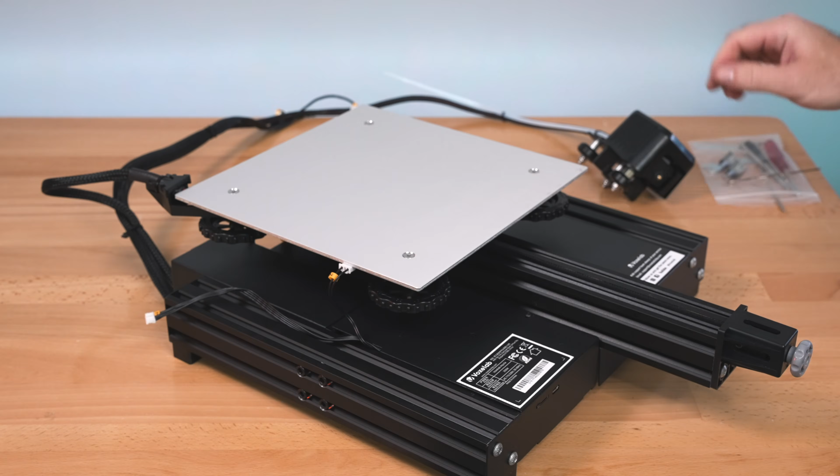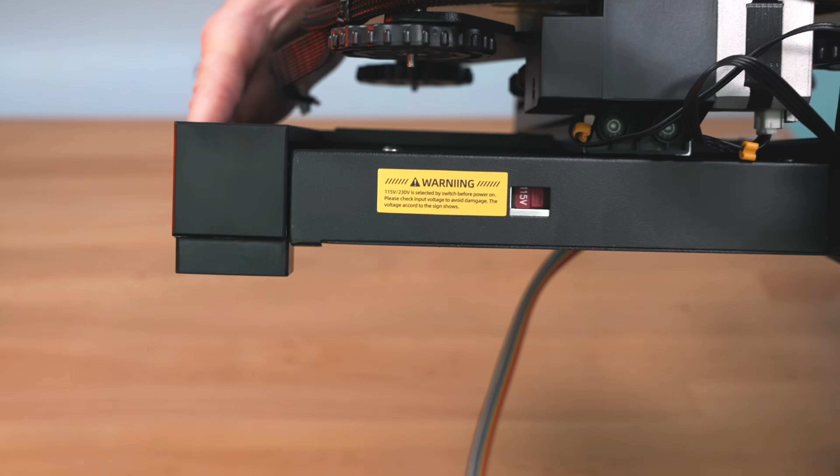Before we get carried away and start assembling this thing, because you know that's going to be pretty in-depth, let's go ahead and do something that's pretty important and you don't want to forget. So the first thing is our voltage selection there in the back. Depending on where you live, you're going to switch that either to 115 or 230, and you guys can see that ours is switched to 115, so we don't have to do anything. So make sure you check that before you forget, because if you don't switch that to your voltage, you could damage the printer.

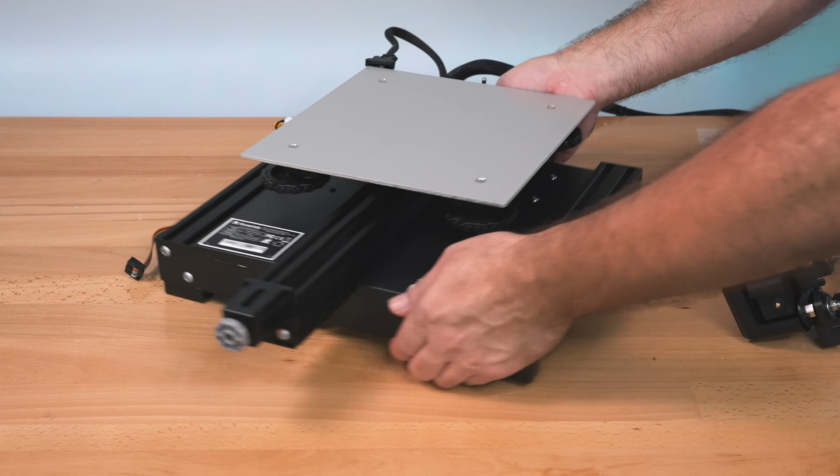So the next thing we want to do is check our frame, and what I mean by that is that if we put the printer down, we can see we have wobbling back and forth. So what this means is that the frame is not sitting straight. No matter how I put it, it still moves around quite a bit. It wasn't assembled straight on a flat desk. So make sure you have a flat surface before you do this, wherever that is. We're going to grab the larger wrench that was provided, and we're going to loosen these bolts on the sides. There's 4 of them. Surprisingly, they were already pretty loose. So this is going to release the frame where it can bend in the right shape, I guess.

So now you guys can see we don't have that wobble anymore. We just untightened the bolts and it kind of fell into where it needs to be. So all we got to do now is retighten them. This is a pretty important step, because you don't want to have the printer all built out and then be doing this later. Make sure you snug these all up. Even if your printer is not crooked and already nice and level, you need to go back and check all these bolts and make sure they're tight enough, because most of the time they get loosened over time. Get them pretty snug, but don't over tighten them. Be careful with that. We do have 4 of them, so we have pretty good clamping force there.

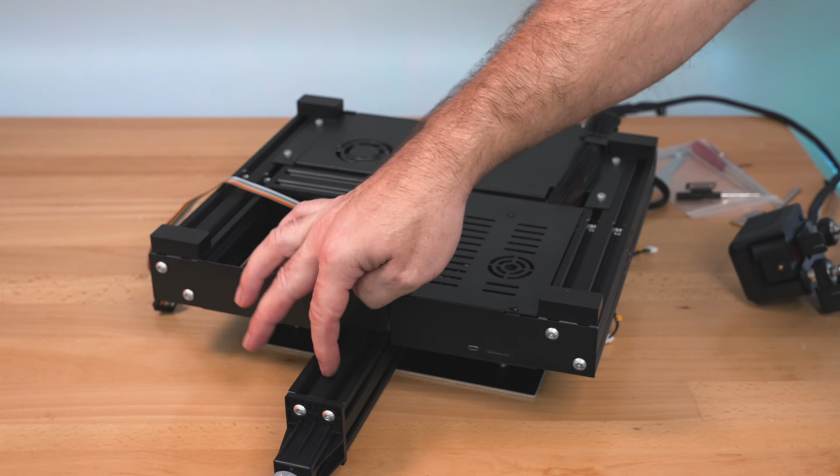All right, and we're gonna do the same thing on this side. Make sure that it's still level, and then we'll snug these all the way up also. All right, so we're good now. After this, go ahead and flip over the printer. Under here, we need to check the bolts here in the middle, which hold the Y-axis rail. You want to make sure these are nice and snug, and mine were too loose. You want to snug these up pretty good, because this is the main point where the Y-axis is held. You want to make sure that doesn't move while you're printing. So we're going to snug these up pretty good. And that's it. That's our main frame bolts for the bottom rails that hold kind of the whole structure together.

Now while we're under here, you guys can see we got really nice, big, large, squishy rubber feet on 4 corners. So I'd love to see that. That's going to minimize the vibrations coming from the printer, which will help with noise. So let's flip this thing back around. Check again, make sure nothing's wobbling and it's straight. If you do have wobble, go back and fix it, because you don't want to have any kind of play in the frame.

Another thing that's good to adjust before you assemble it all together, because it's easier to reach, is the bed here. Because we don't have our frame built yet, we have really good access through the side. If we look underneath, we can see there's some rollers there, and you can also see the eccentric nuts, and that's what adjusts the roller farther and closer away from the frame. We got 4 rollers, 2 on this side and 2 on the other, and they go around the frame. These are adjustable and these are just stationary. So we're going to grab this open-ended wrench and we'll be able to turn our eccentric nut with it.

Now before we do that, we need to check it. So what I'm going to do is go underneath and kind of spin the rollers. There's a little wobble. If you guys maybe can see that, it does move around. But this one here is perfect, and that one needs to be tightened up just a little bit.

So the idea here is that you want that little roller, you want it to kind of spin in one spot. So you want to grab your hand under there and spin it. So I'm actually spinning the roller. If you can't spin it, that means it's too tight. And if it's too loose, you're going to have a lot of wobble in the bed.

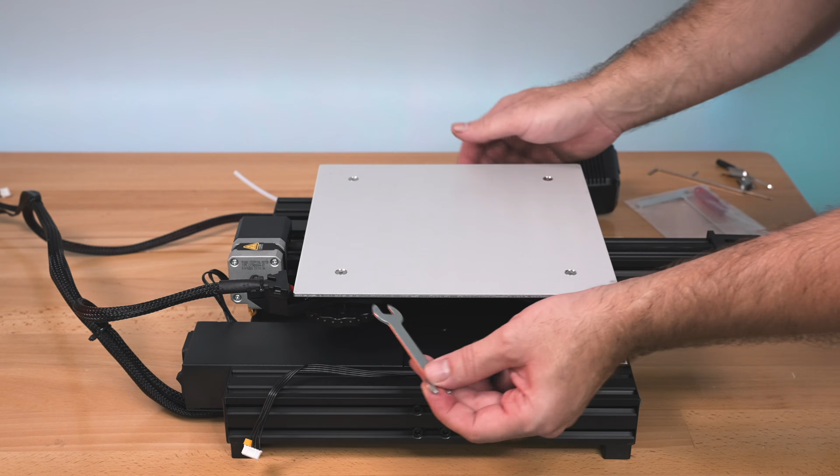So to tighten it or loosen it, we're just going to put our wrench on the eccentric nut and then turn it one way or another. All right, so I turned it a little, and that's actually perfect. Right now I can spin the roller with my finger, so that tells me that it's not too tight. If you can't spin the roller with your finger just in one spot, kind of like doing a little burnout, that means you're too tight.

But if you're too loose, you're obviously going to see the wobble. So the idea here is to get it just tight enough where it doesn't wobble. And this is what we got here, and you're going to have a really nice smooth operation. This is quite important for getting the best print quality out of the printer, is to adjust all these things correctly. Hopefully that made sense.

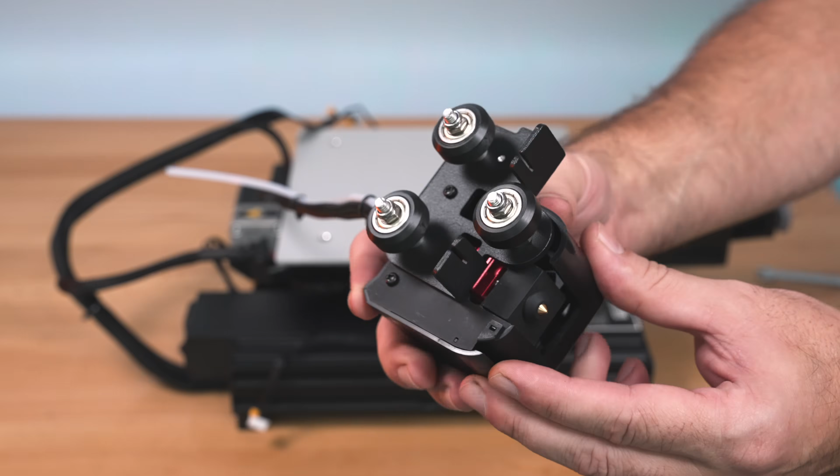You guys can see here on the hot end we have the same situation. We got 2 stationaries and 1 adjustable down here, and we're going to do the same thing later on. We're going to adjust this roller to go up or down to get closer or farther away. So yeah, pretty simple once you understand how it works.

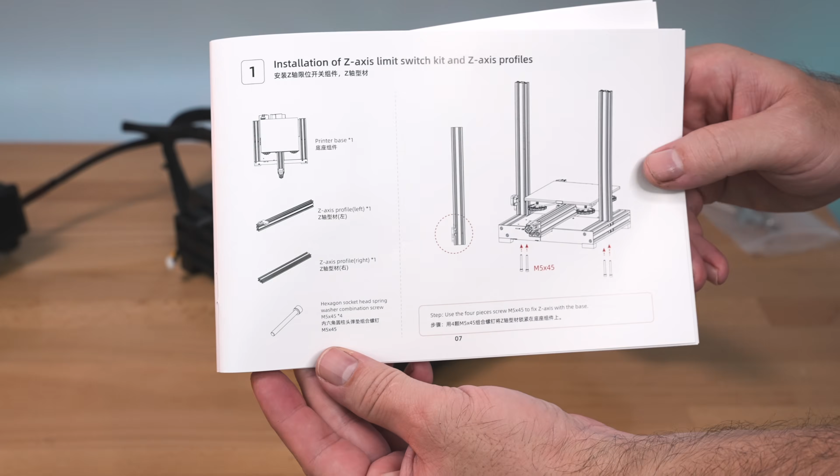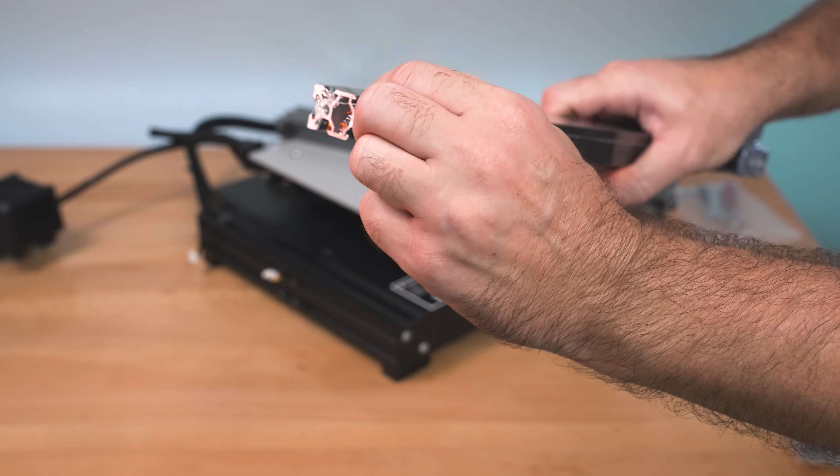All right, so let's go ahead and go to our first step, which is going to be installing the Z-axis profiles. We're going to need 2 channels and 4 bolts that will go underneath. So here we have the channels. Let's go ahead and unpack them. You guys can see our Z-axis switch is already on here. Go ahead and pull out our lead screw, put it to the side. Be careful with the sharp edges on the ends.

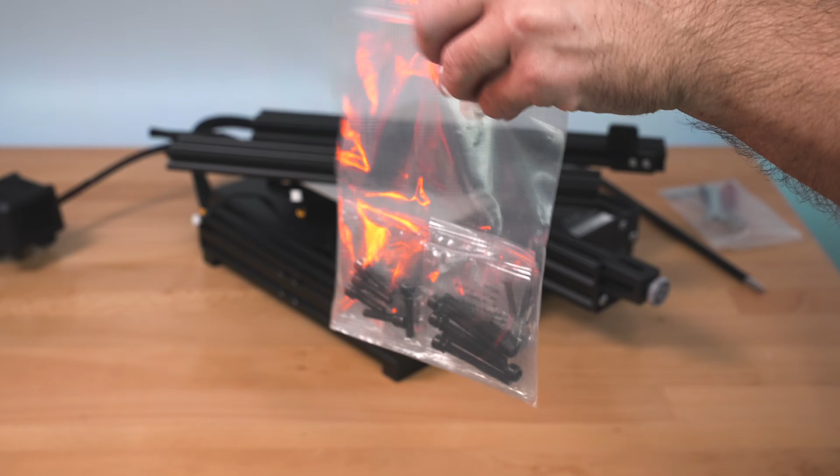And the other channel is just clean with nothing on it. And they're going to go on each side of the printer. The one with the end stop switch will go here. We can see the plug to it on the left side. But before we do that, let's find our bolts, which are in this bag. There's little packets that are labeled, and the one we're looking for is called M5x45s. Little letters on the packets say what they are.

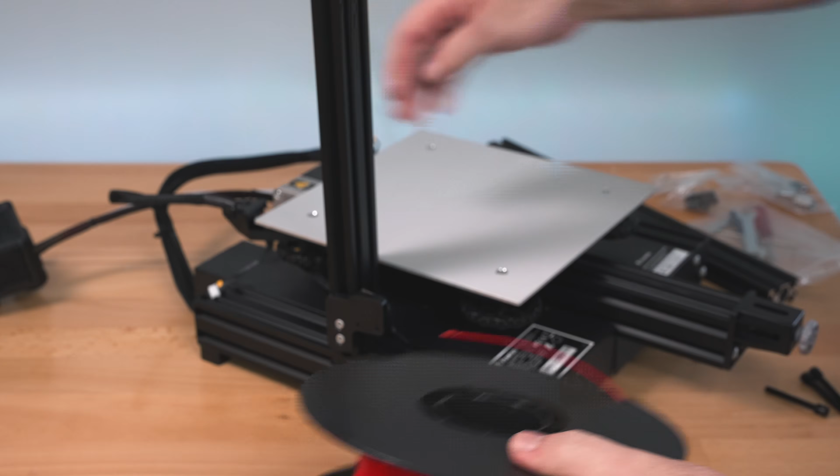All right, so let's start with this one here with the limit switch, and it's simply going to go like this. Our bolts are going to go underneath from the bottom up, and you guys can see them sticking out right here. We'll go ahead and put both of them through. We'll grab our channel, line it up, and start it with our hands. However it is easier for you to do this, you can go completely sideways or maybe even prop up the printer with this spool here, so it kind of helps you hold it.

But yeah, we're essentially just going to start the bolts and run them down. We'll grab our wrench. We are going to need to go a little higher here. Now it's quite important that you don't tighten this yet. So just run them down is all we're doing. The reason you don't want to tighten it is because we still have to assemble everything, and we want this thing to move around and naturally kind of go where it wants to go.

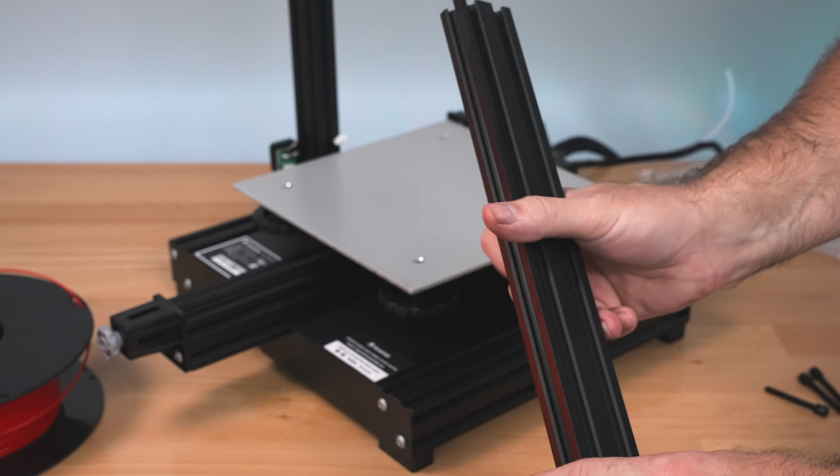Same thing for this side. On this channel, it doesn't really matter which is the top or the bottom. It's exactly the same, looks like. So we'll grab our bolts and channel and go ahead and run them up. And they actually do include an extra bolt just in case you need it. And now we have both of our Z-axis channels on.

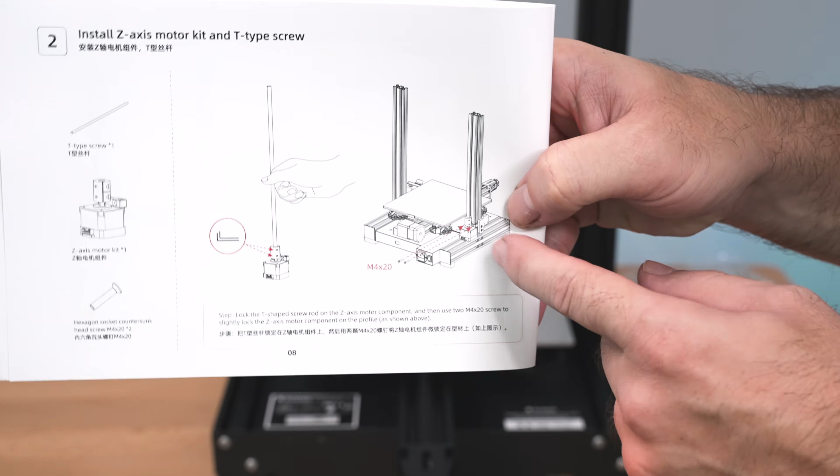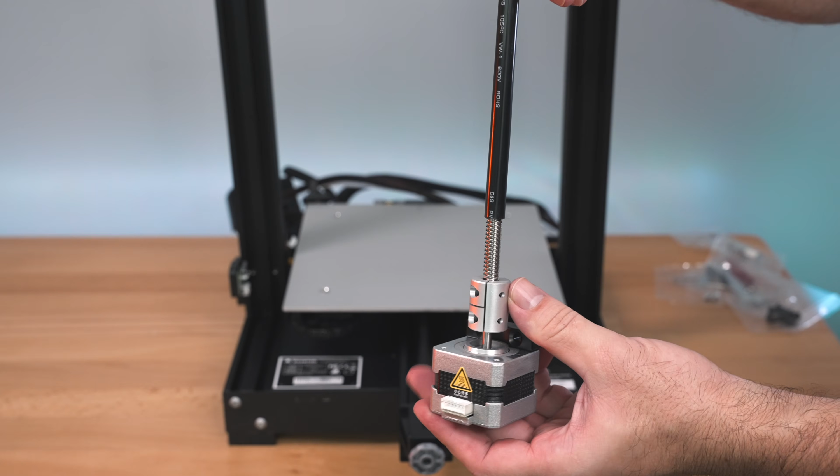All right, so for step 2, we're going to be installing the lead screw into the motor and then installing that into the printer. We're going to need 2 bolts, which are M4x20, and these are in their own separate pack. So let's grab the motor and the lead screw, and we'll put the lead screw inside the coupler, just like that. You can push it all the way down, but I recommend lifting it up just a tiny bit. I mean, just a hair.

That way the lead screw doesn't touch the motor shaft, because there is a potential it could make noise. Now we're going to grab an Allen wrench and tighten this bolt on the top to clamp it together so the lead screw doesn't come out. And we can check the bottom bolt too, make sure it's tight. Pretty simple here. And it looks like we're really straight. I'm spinning it. So that's great.

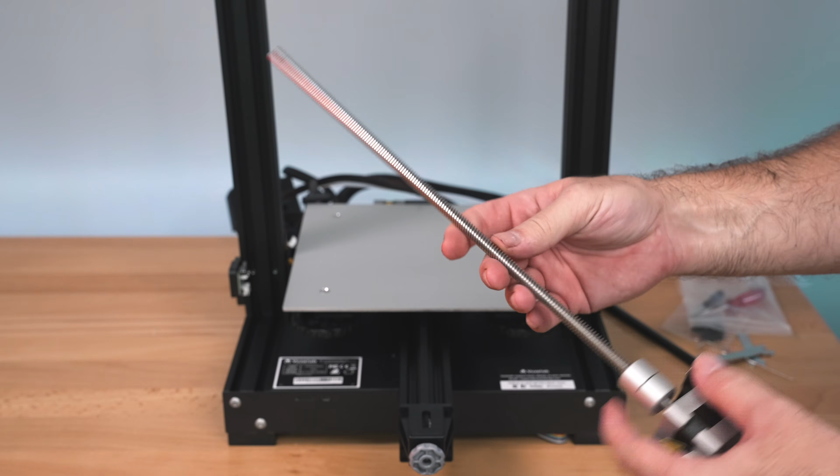And also, if you want to make sure your lead screw is straight, you can grab it before you install it and just roll it on the table and see if it wobbles around. That'll tell you if it's straight or not. If it does have a little bit of wobble, that's okay, as long as it's nothing severe. But they should be pretty straight.

And if you can see this bracket back here, this is where our bolts will go through the front here, and they kind of barely fit in there, so you have to kind of force them in, as it's really tight. And then this part here will screw into our channel, which is going to be the same side where the end stop switch is.

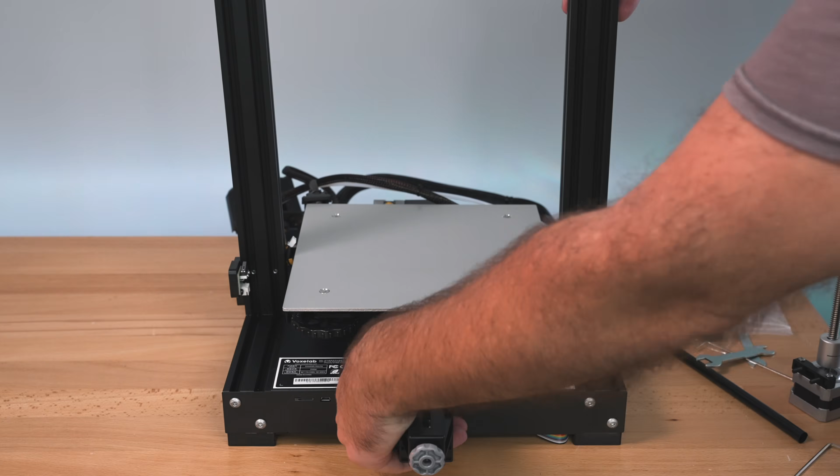Flip the printer around. You can see there's a couple threads there through the channel, and that's where the bolts will go. So we do need to raise it a bit so it can line up, and then we're going to tighten it up. So this bracket here, the way it mounts, it's pretty secure where it needs to be, but it still does move around quite a bit. So you can probably see how much the lead screw moves on the top.

So what you want to do is line it up. If I could show you, try to get the whole side here. If you can see the lead screw in the channel. So the channel is not tight yet. But since this thing does mount on the channel, what's important is that your lead screw here is not offset to one side. So if I do this, you can see that's obviously not okay.

If you're even a little off, that can put strain into your lead screw. So basically what you want to do is just line it up as straight as possible to the channel and then tighten those little bolts up. And we should be good right there.

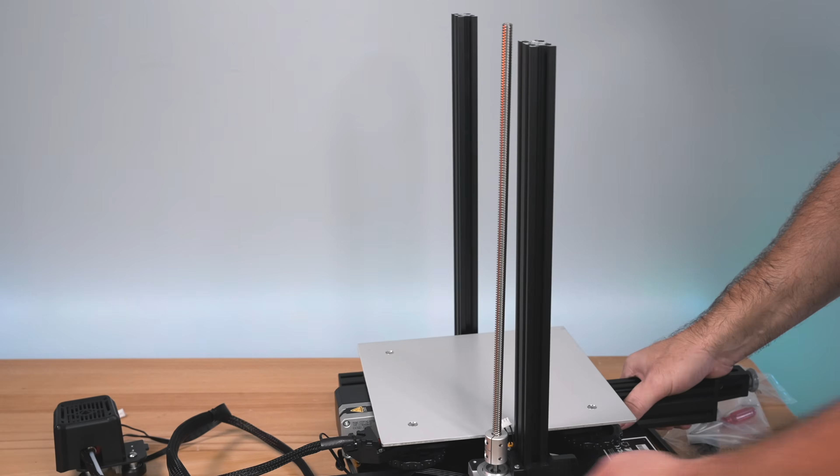Now another thing that you might want to check, and you don't really have adjustment on this, but if you can see here, you want this to be as close as possible to having the same gap, but it's a little bit off. If I spin the lead screw, you can see it does have a little bit of play. It's very tiny, so I would say this is pretty much perfect.

But this part, if you want to absolutely get this perfect, you'll have to adjust something down here, like shim the top, or better yet, there are tiny little bolts on top here that you can loosen, which will let you give play back and forth. But from my experience, this is pretty close to where it needs to be. So just a little bit doesn't make a huge difference there. And plus the higher it goes, the more leverage you'll have to push this back a little bit. So not a big deal, but if you want to be a perfectionist, you can adjust that.

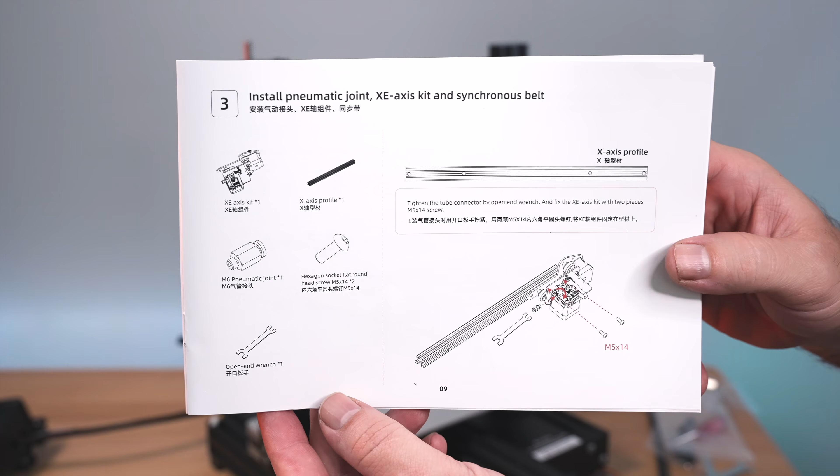All right, hopefully we're not going into too much detail here. So for step 3, we're going to be building out the X-axis assembly with all the parts on it. So we can move the printer to the side for now, and we're going to need to grab the X-axis channel, and that's going to be the one with a bunch of holes, and also it's longer. So if you see the 2 smaller channels, one of them is longer, that's the one we need. And the sticker here says X-axis profile.

So this might get a little more complicated because we do have a lot of holes and hollowed out places, and you're just gonna have to pay a little more attention in these steps here. But believe it or not, it's not that hard. So these are all the things we're gonna need: the main extruder assembly, a coupler, which it does come with 2, but we just need 1, I think, 2 M5x14 bolts, and this wrench here.

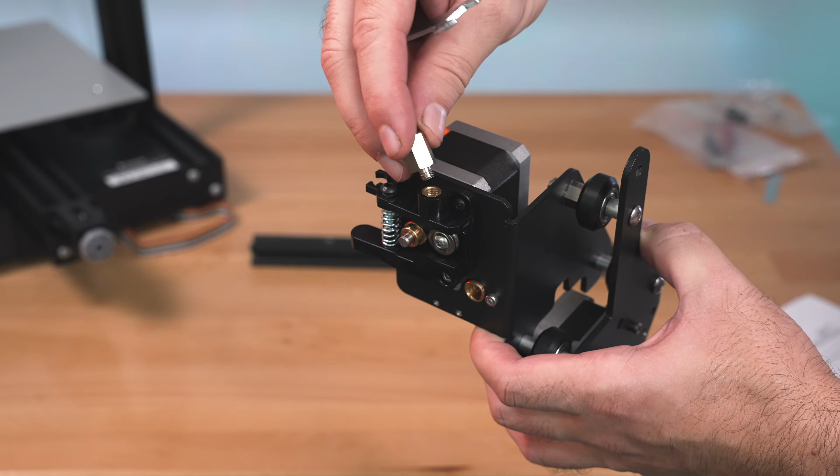So let's first go ahead and grab the little coupler and we'll install it onto the extruder mechanism. So literally just, and then we're going to take our wrench and just tighten it up. But be careful not to make this tight. Just snug it up a little bit and that's it. You don't want to over tighten that. So yeah, as simple as that. We got that on there.

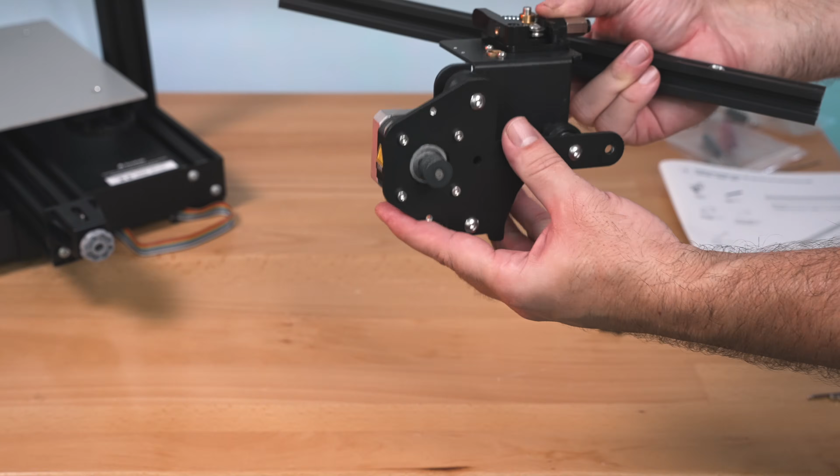All right, so for the next part, we're going to have to connect this piece to the channel, and it's actually not too hard. It's just a little bit maybe confusing because you got a bunch of holes everywhere. The way you know you're doing it right is that if you see this bolt here, this bolt is actually going to fall into one of these hollowed out spots. It actually looks like it's symmetrical maybe. So maybe it could go on either end. Just kind of interesting. If they designed it that way, that's actually a lot easier to figure out.

You're just going to simply grab the hollowed out part and set it over this bolt. And then you got a hole here that will line up with the threads on the channel, which a bolt will go through the other end here. Through there, the bolt will go into here. And I'm gonna go ahead and check the other side to confirm. And yeah, sure enough, guys, it doesn't matter which side you use. Either side lines up, so that's kind of cool.

One of our bolts is gonna go in there, and then the other one actually goes up here on the front next to that. So again, if you can see that, pretty simple. Put it together, and then a bolt here and a bolt here. In any case, you can kind of see here how it goes together. We can go ahead and snug that up. This does move on the channel back and forth, so kind of line everything up, sort of center and tighten it there. All right, and that is our step 3, guys. So making pretty good progress.

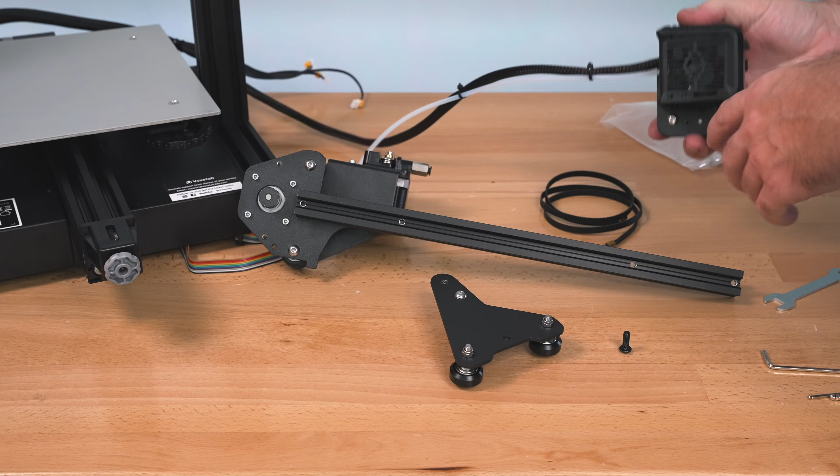So here we have step 4, which involves a lot of things: we need to slide in the hot end and then also install the end bracket, and at the same time also put the belt on. It's not as bad as it looks. We're also gonna need one more of these bolts that we just used, which is the M5x14, our end bracket, and also our belt. All right, so we got all of our parts here. You wanna grab your hot end facing up, like this. The main thing here is to make sure that all your cables going to the printer that are tethered to the hot end are not all twisted in funny ways. You wanna make sure it's pretty loose and happy where it's sitting like this.

So if we grab what we just built and we grab our hot end with the nozzle pointing down and our wires not tangled, roll the hot end literally on the rail here. Just like that. Now, before you roll this on, it's probably a better idea, so we're gonna roll it off, to go ahead and set our belt down into the channel with the teeth pointing down, about half of it on each side. That's gonna drop in there. Once you got your belt on, we're gonna grab the hot end and literally just roll it on there on top of the belt. It's not too hard. It seems complicated, but it's pretty straightforward.

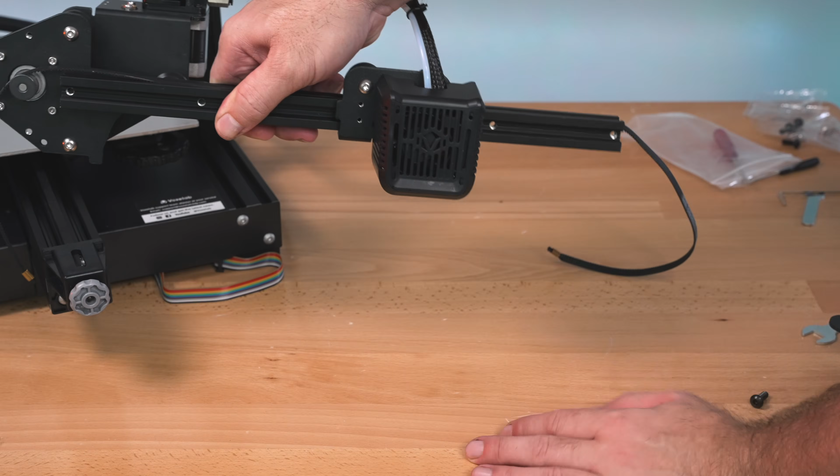After this, we're gonna install the bracket at this end, and it's this guy here. If you see, there's 2 nuts and then a bolt here. This bolt will go on the back side of this channel where the other wallowed out part was, and it's literally gonna line up right here like this. And there's 2 bolts that go here. I think they only want us to put this one on this side, because we have a tensioner bracket on the other end. Again, here you want to line it up as straight as possible and then snug it up. But yeah, simple as that, guys. You can see that all of our pieces are on.

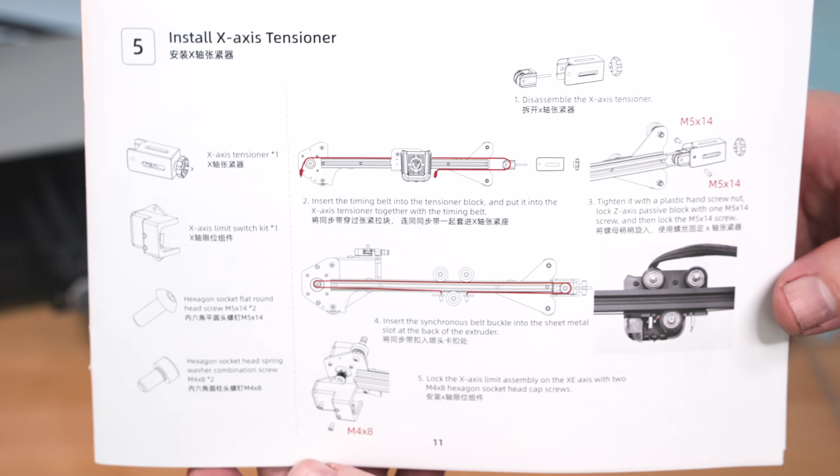The hot end's on, the belt's going around, and our bracket here at the end. All right, so for step 5, we also got quite a few parts here to install. So we're gonna install the tensioner for the belt. We're gonna actually connect the belt to the hot end. And we're also gonna install the end cap for the X-axis limit switch.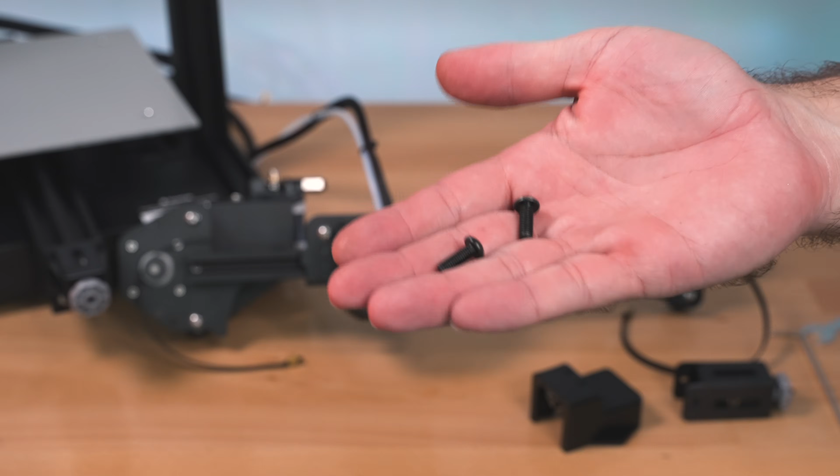So let's go ahead and grab that. And you guys can see that it has the switch already installed in it. We got the tensioner here, and you guys can see the bearing inside. And then this is how we're gonna loosen and tighten it. So we're gonna need 2 more M5x14 bolts and 2 M4x8 bolts, which are actually in this spare baggie. They're not labeled, but according to the picture in the manual, this is what they look like. All right, so we got everything we need.

So first things first, let's go ahead and install this tensioner. So what we need to do first is unscrew the nut here completely. And this is probably the easiest way to do it. So once that's out, we can go ahead and drop the whole mechanism out. So we're gonna feed our belt through here like this. And after we feed it through there, we're gonna install it back into this bracket, just like that. And then put our knob back on, the tensioner. And we're just gonna start it, not go too far because we wanna have it as loose as possible.

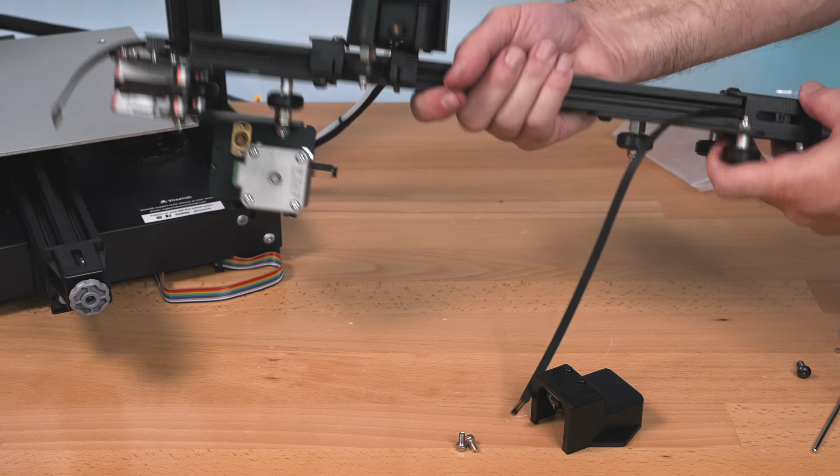And so this bracket here is gonna go right around the channel here, just like that. And it's gonna line up with some threads on this side. And if we flip it around, there's a hole here with threads also on the other end. And you don't want to tighten this very hard, guys, just ever so slightly, because it's plastic, so if you tighten it too hard, you'll warp it. So just snug, since there's 2 of them on each side, it should be plenty. But yeah, simple as that. We got our adjuster on here.

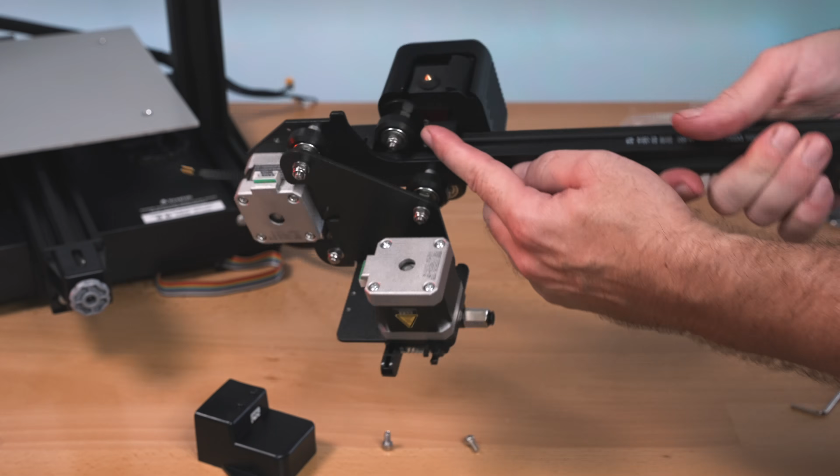So now we can go ahead and connect the belt. So let's grab this one end. And if you guys can see on the hot end, there's 2 notches, and this is where the belt's gonna go. So it literally slides in from the side. Hopefully you guys can see that. Just like that, it just slides in there. And the other end slides into the other one. So yeah, pretty simple. Just make sure your belts are lining up to the center of the channel, and that looks really good right there.

And now we can tighten this up a bit, so we can tighten the belt, and it's actually already pretty close to being tight. And be very careful with over tightening this, because it's so easy to over tighten it. Feel the belt, make sure. And mine's already pretty good, and I just tightened it a bit. So with the belts, you want to be looser than tighter, so keep that in mind.

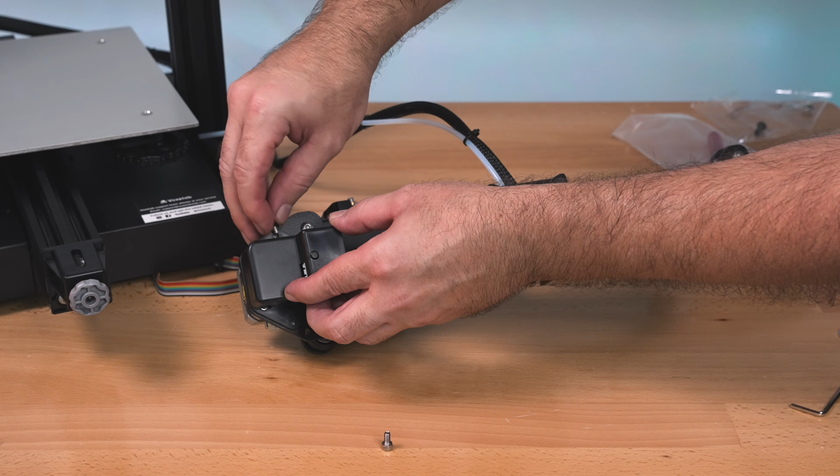All right, and so for our last part here, we just need to install this switch box here that literally just sits right there, and these are our 2 little bolts that will hold it. So yeah guys, as you can see, it's not too bad, and honestly, if you enjoy putting things together, this will be pretty fun for you. Plus you get to kind of learn the printer a little bit, how it works. But yeah, that's on and it's tight, and our switch is there, and so if we go with the hot end, we can see it switching.

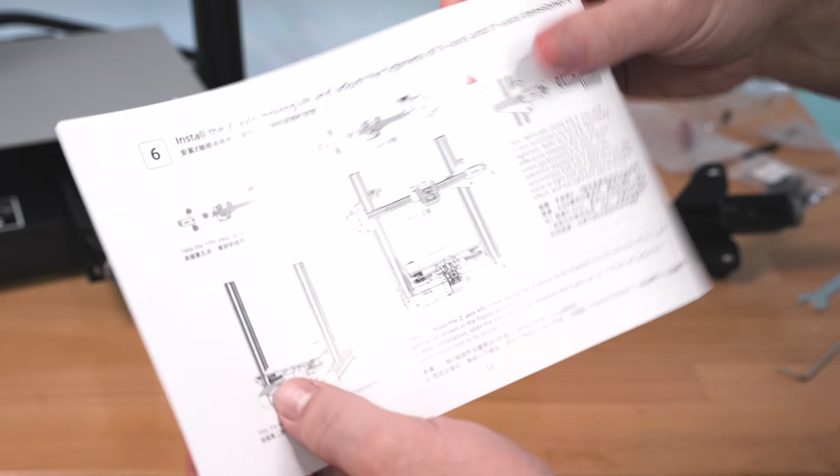All right, so if you got this far, you're doing good, because this is probably the hardest part of the whole assembly. So let's go ahead and go to step 6. So for step 6, we're gonna roll the X-axis assembly that we built here onto the printer. Again, make sure that you're not tangled with all your wires back there and they're happy where they wanna be. So if you have to, untangle them, but mine are good right there.

So for the next part, we're just gonna literally grab it like this and set it over onto the channels. And the little wheels are going to kind of roll on there. So yeah, just like that. Now on the back side, flip it around here, the lead screw needs to line up in this brass bushing right here. So we're gonna kind of line it up, and then we're gonna turn it, bring it down.

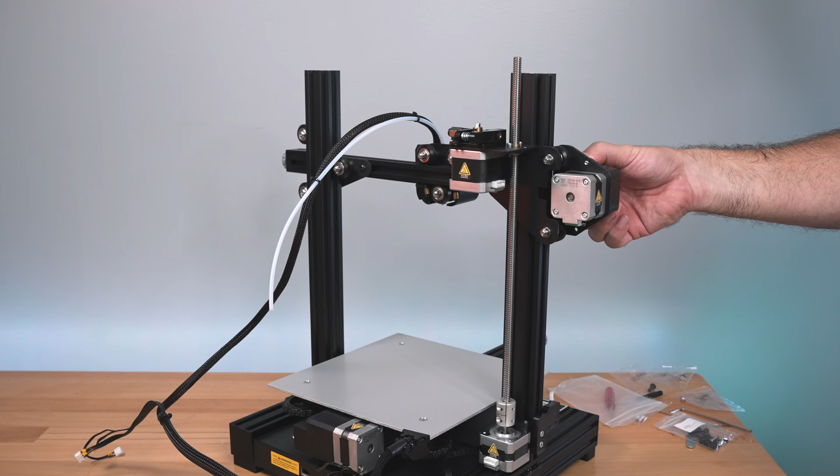So you guys can see it just literally rolls right down, and it's very smooth here. I can probably even push it with my hand, yeah. Now, if I forget to mention this later in the video, you do need to put some kind of grease on here to help it travel a little better and not wear out that brass bushing. So any kind of grease or oil will do, and if you don't have anything, even cooking oil will work too. But yeah, this is pretty simple here, and it just walks right on.

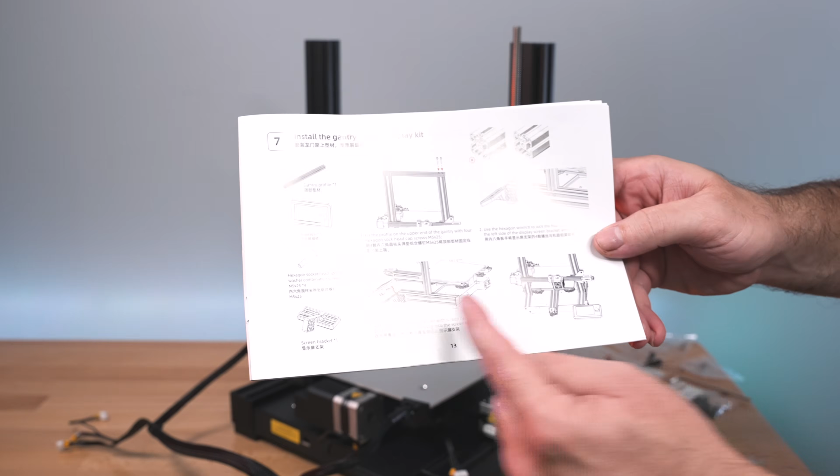Now in the manual, it's talking about adjusting the tightness of the belts, which we'll actually do a little bit later when we adjust everything and check the whole printer. So for step 7, we're going to be installing the top frame piece and also the screen on the side of the printer. So let's start with the top.

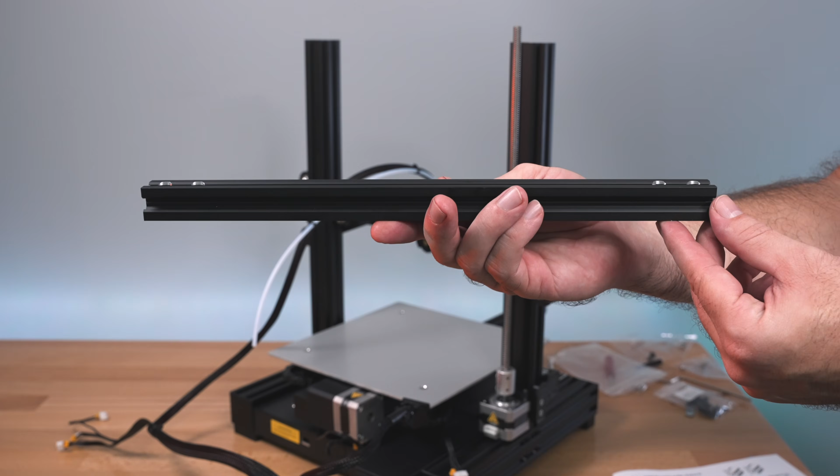Grab this last channel. Again guys, be careful when you take this off not to cut yourself on these corners. So on this channel here, it's pretty simple. We got 4 holes, and one side looks like this and the other side is wallowed out. So the wallowed out part goes up like this. So literally just like this is how it sits on the printer.

So there's a baggie of M5x25 bolts, and we're going to need 4 of them, but it does come with an extra one. And those are going to go right up here into this channel. And we'll grab our wrench and run them down. So we're not tightening anything, we're just running them down for now. And if you guys remember, we haven't tightened any of the channels underneath either. So this is good because now we can space out the distance here evenly with our assembly.

So what we want to do is raise this up all the way it goes, and that's given us the correct distance between these 2 channels. So now that we know that's good, we can go ahead and tighten the bolts on the top, and we do want to snug these up reasonably well.

All right, for the next part, we need to go back down, and it goes down pretty easily. So we're going to go down as much as we can, and then we're going to go underneath the printer and tighten those bolts, because now we have the right spacing on the bottom because our X-axis is all the way down. And so this will give us a very accurate travel distance from the bottom to the top without any kind of binding, or getting smaller here and larger there, and that will cause print issues too.

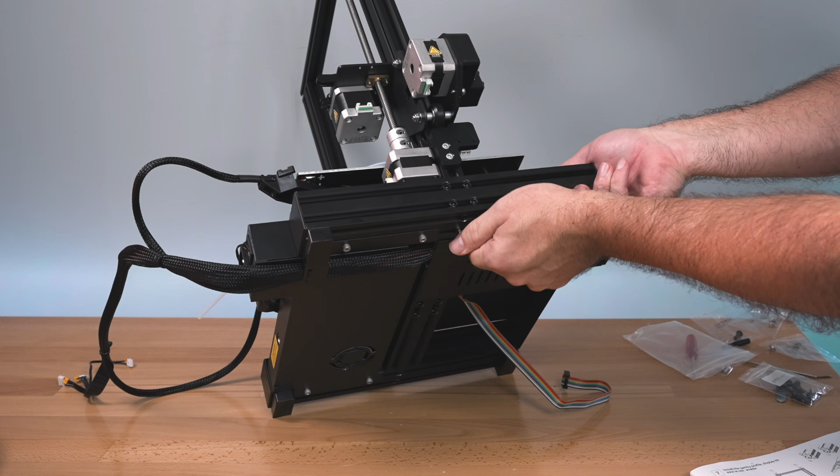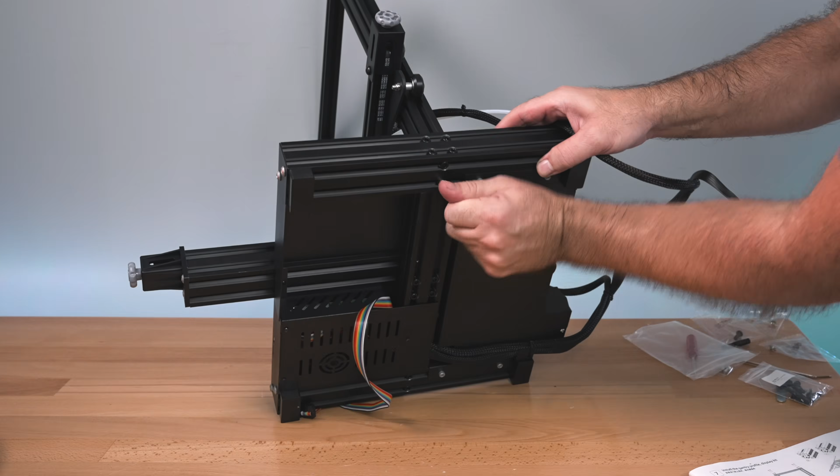So now we're just going to tighten the bottom up. And you want to be pretty generous with the tightness here. Obviously nothing crazy, but this is the only thing that's holding our whole gantry up, our upper portion. So we want it to be pretty stiff. Now we'll go to this side. All right, and now we're done with our frame.

So another thing to note, once you build the whole frame, there is a possibility that it could fall out of level again. That happens sometimes. Mine is good here, but if you do need to go back and loosen these bolts on the side and flatten it out, this is a good time to do that.

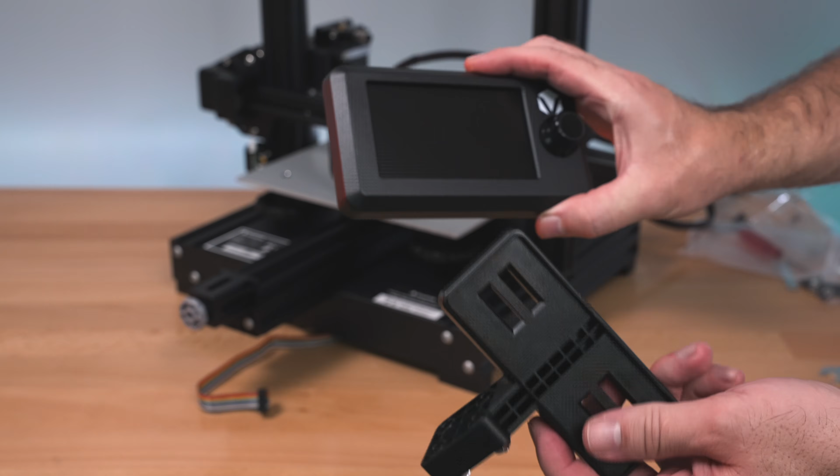So we do need to install the screen next, and it comprises 2 pieces, the screen itself and the bracket it connects to. The bracket itself has the hardware already connected, and you guys can see they're T-nuts. So the first thing we need to do is loosen all these bolts so the T-nuts can spin around. And we're going to line them up with the channel. Once they line up, we're going to tighten them, and they're going to turn into the channel and lock in, you guys can see. And the way they turn is kind of tricky.

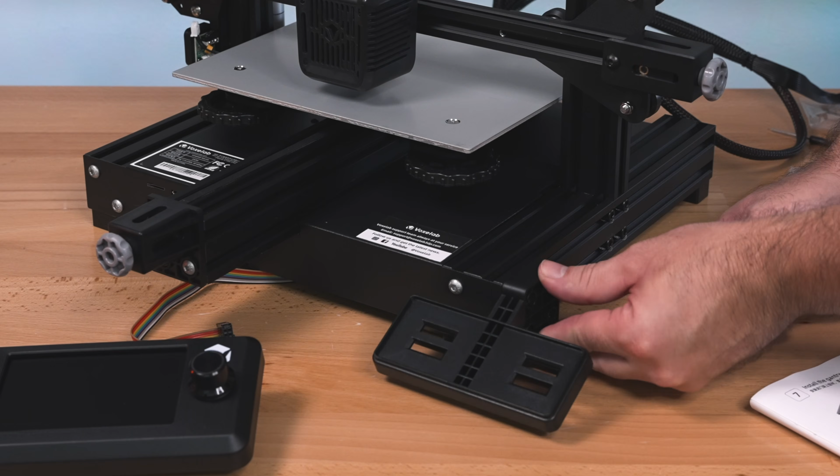But there's no easy way to, I guess, explain this. But yeah, you first line them up so they can all fall into the channel. As you guys can see, they all fell in. And so then you're gonna kind of hold it where it's in between, not all the way down or all the way up or to the side. You kind of have to give it some air or freedom, I guess, to spin around.

And so then what we're gonna do is we're actually gonna unscrew the bolt and then start screwing it back in, and that's going to tighten it. And so one of them grabbed, and we're going to do the same thing for the other ones. Unscrew it and then screw it back in. It should turn and grab. So because there's 4 of them, some of them will grab for sure.

But yeah, just the idea here is to unscrew it and then screw it back on, and the T-nut actually turns into the channel and locks itself in. And it's quite important that the bracket is lined up pretty straight with the grooves. If it's not, it's not going to work.

So the bracket's on. Now we can go ahead and clip the screen on here. But before we do, let's go ahead and plug it in. So we got this wire coming out the front. There's a socket here that it plugs into, just like that. And we can also see here a speaker for noise making.

So yeah, now we're just gonna set it down onto the bracket. Just watch out for that wire underneath. And then we're just gonna clip it on like that. So yeah, it's on. Very cool. That wasn't very hard, and now we have the screen on. All right, so we're getting close, guys.

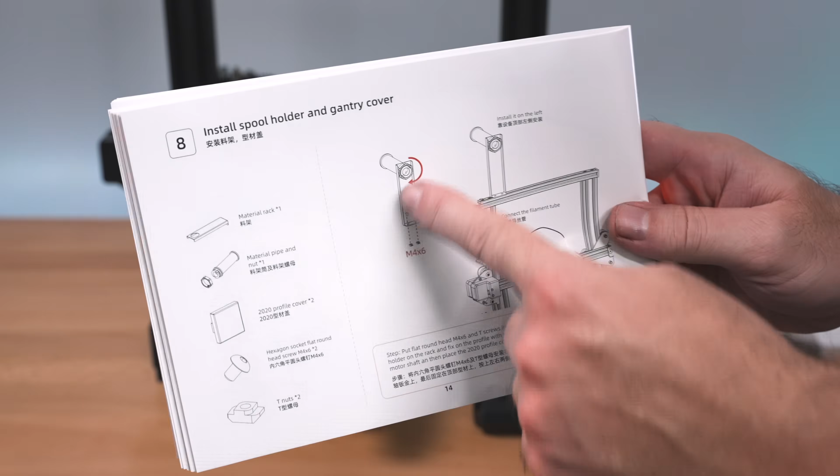So for the next part, we're gonna install the spool holder, the end covers for the channels, and also plug in our PTFE tubing. So while we're over here, let's go ahead and do the PTFE tubing. This is quite simple. This is the tube here, and we're just simply gonna insert it, just like that. Now you wanna go as far in, and then there is a little black part here that kind of holds it in there, like a locker.

But a lot of times these PTFE tubings will move around with retraction, and this one does have a little bit of play in it. So we might have to print out a little clip that holds the coupler from moving around. So keep that in mind. And also, if this coupler here is not working out for you, you do have an extra one that might work better. But yeah, simple as that. The tube is on, and then our wiring will go back, and there's a little clip behind here that the wiring clips onto.

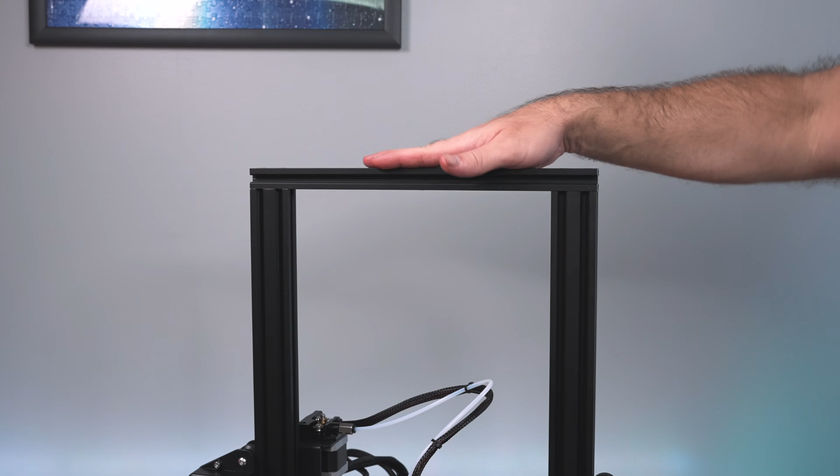So let's go to the top where we're going to have to install this spool holder. If we're looking at the front of the printer, our spool holder needs to be on the left side, as close as possible that way. So with a nice flat face going to the front, our spool itself is going to go to the back, so we're going to install it here, and then the locking nut will go to the front, and then we're just going to turn it and it's going to lock it in. So yeah, simple as that.

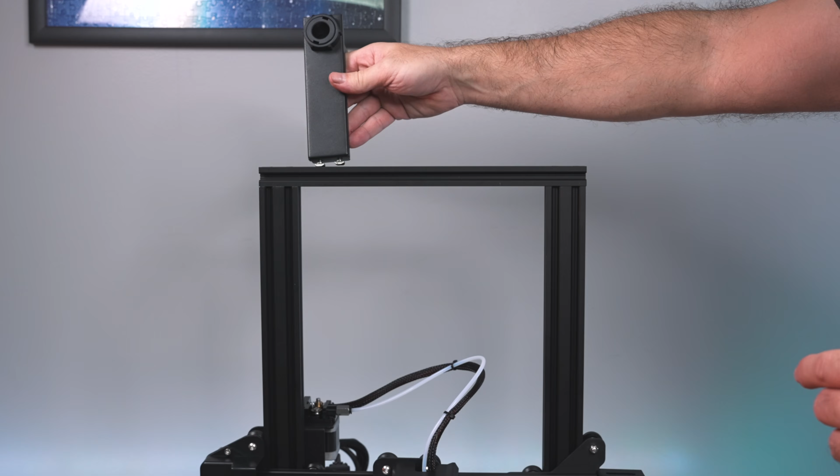But we do need a couple T-nuts and bolts, which were in the spare packet. What we're going to do is put the bolt through and then screw the T-nut on, facing this way on both of them. So yeah, just like that, guys. You can go ahead and insert it into the top channel here, so the T-nuts will line up and fall in. And again, we got the same concept here.

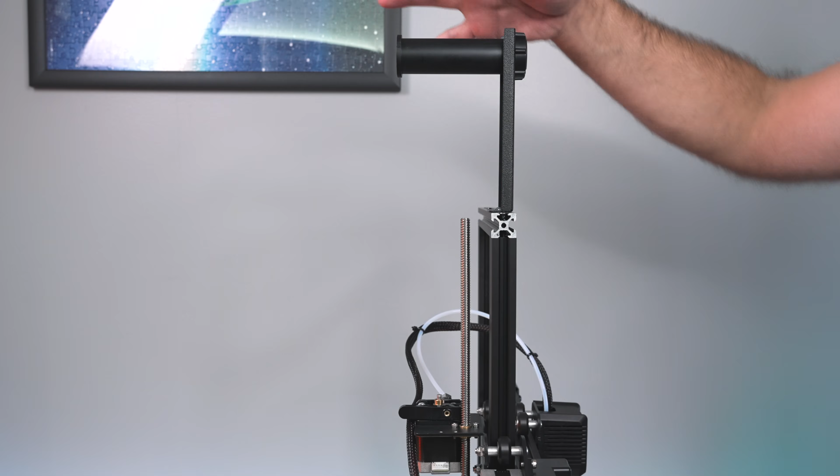We're going to undo the bolt and then tighten it back in, and that should turn it and lock it in. And sure enough, this one locked in. Now we just got to do the other. And you guys can see that it's facing towards the back. The reason for that is because whenever you put your spool on here, your filament will feed into the extruder right here.

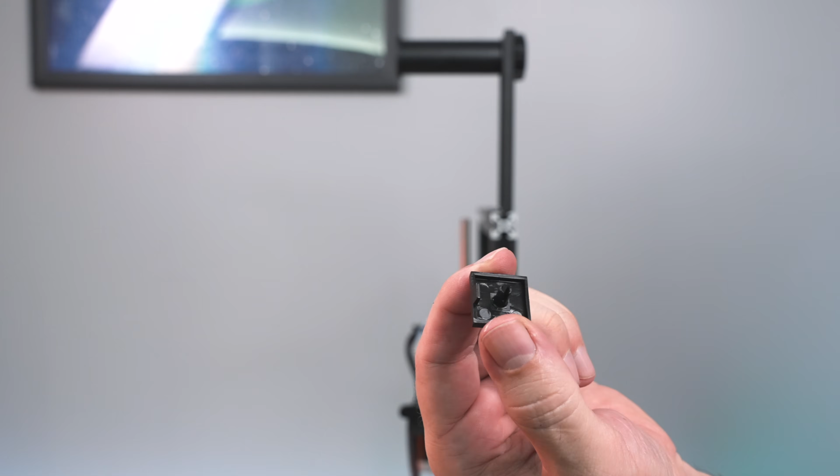All right, so for the end caps, which are in their separate baggie, you're going to install them right here on each end. They simply just push on. And if they don't go on too easily, you can tap them with something, and that'll make them go in all the way. Same thing for this side. I'm gonna need to tap this one too. And there we go. So now these corners are not sharp, so if you bring your hand around here, you're not gonna cut yourself. I like how they thought through that.

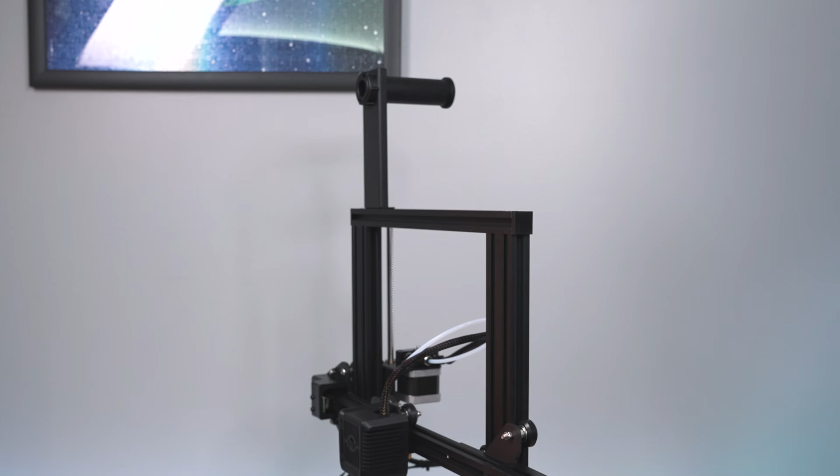All right, guys, so we are on our last step, which is connecting all of the wiring. And this is actually quite simple because most of our connections are right here on this side of the printer. And you guys can see where I put this wire through here. There's a little clamp that holds it. So all of our wires are labeled, and it's quite easy to figure out where they go. And if you guys notice, some of them are a little bigger and smaller. So the bigger ones are for motors and the smaller ones are for end stop switches.

So here we have a big one that says E, and that's going to be the extruder, this motor here. So let's plug that in. All right, here we have another big one that says X on it, and that's going to be the X motor. So that goes under there. Plug it in. Going here to the bottom, we have another motor, and that's going to be the Z motor, and there's a little Z on this plug. So make sure this Z cable here is not going up where it's going to catch on the bed going back and forth. So that's pretty much everything here.

Let's flip it around. We've got 2 more plugs to plug in. We have this X-axis end stop switch wire, which is here, and there's a little X on it. And this is the smaller plug. And then we have another plug here with the Z-axis end stop switch. And there's a Z on this one. Maybe you guys can see that. It's gonna plug right there. So yeah, that is everything to plug in, I believe, and it's quite amazing that we're pretty much done.

Now we're not done because we still need to check a few things, and that's going to be our belts and our rollers. We did the bed rollers already earlier, as you guys saw, and the reason we did that is because it's a little, well, actually it's not too hard to get. Yeah, so I guess it doesn't really matter. You can do it afterwards. It does come out right here where you can get to it quite easy. So if you haven't adjusted your bed yet, go ahead and do that now, or if you need to maybe readjust it, you can.

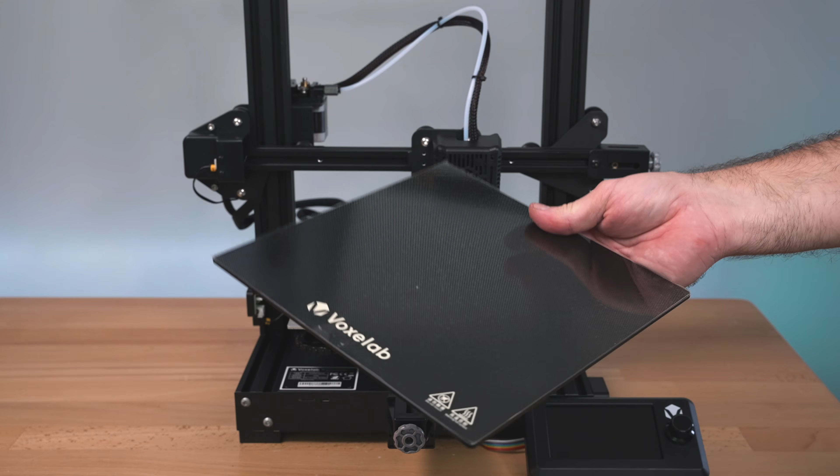So, all right, well, that pretty much concludes the assembly. We can now go ahead and put this bed back on. And you don't want to take off the sticker until you're ready, because you want to keep it as clean as possible and not get any kind of grease or anything on it. So yeah, slide it on there, put our clips on, 1 in the front and 1 in the back, and we are officially finished with the assembly.